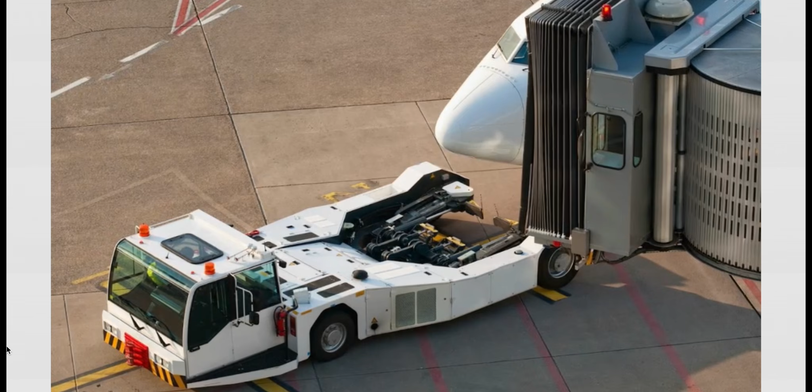At present, there is no real standardization between the certification of aircraft equipment and airport equipment, services, and facilities. With the total system approach to AWO, EASA is attempting to standardize the certification of all portions of the equation. Currently, airports have the equipment, airplanes have the equipment, and there are no real standards between the certifications of each. Runway suitability really should be determined by aircraft type and equipment, because trying to define what is regular, irregular, suitable, or not suitable doesn't really work unless you're thinking about what the aeroplanes are capable of accomplishing under current conditions.

This program will not go into detail about low visibility operations, LVO, since the definition extends to all those below an RVR of 550 meters. The LVTO concept of operations extends to all takeoffs with an RVR of less than 550 meters. However, they will require specific approval for those LVTOs with an RVR of less than 400 meters, continuous descent final approach, and performance-based navigation, but these are covered in separate courses which will be edited to include some of the material covered in this program. List of regulations.

The new CS AWO Issue 2 is divided into 3 subparts. Subpart A has all the info on the enabling equipment: ALS, HUD, EFVS, SVGS, CVS. Subparts B and C basically contain the performance requirements and airworthiness type information.

EASA Implementation Document, October 15, 2022, document 013. ICAO Annex 1, 4, 6, 10, 14. Advisory Circular 120-29, for U.S. operators. Aerodrome Equipment, Services, and Categories.

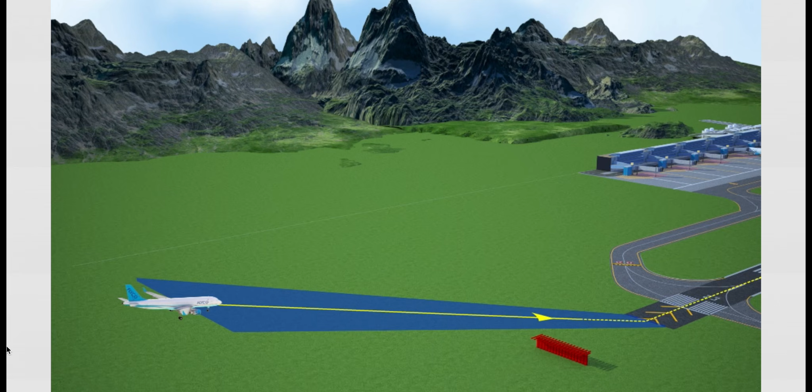Aerodrome Category A is an aerodrome that meets all the following conditions: has a straight-in 3D instrument approach procedure with a glide path angle of not more than 4.5 degrees to each runway expected to be used for landing, and at least one runway with no performance-limited procedure for takeoff and/or landing, such as no requirement to follow a contingency procedure for obstacle clearance in the event of an engine failure on takeoff from any runway expected to be used for departure.

A night operations capability is also required. The contingency procedures for obstacle clearance requirement implies that as long as one runway has no limitation on the engine-out contingency procedure for the intended operations, the airport will be categorized as Aerodrome Category A.

Aerodrome Category B is an aerodrome that does not meet the Category A conditions, or which requires extra considerations due to having non-standard approach aids and/or approach patterns, such as restrictions on the availability of straight-in instrument approach procedures; unusual local weather conditions, such as environmental features that can give rise to turbulence, wind shear, or unusual wind conditions; or unusual characteristics or performance limitations, such as unusual runway characteristics in length, width, slope, markings, or lighting that present an atypical visual perspective on approach.

Any other relevant considerations, including obstructions, physical layout, lighting, etc., such as restrictions on circling in certain sectors due to obstacles in the circling area. Special training or flight crew experience requirements stipulated by the competent authority responsible for the aerodrome that does not include instruction in a simulator or visiting the aerodrome.

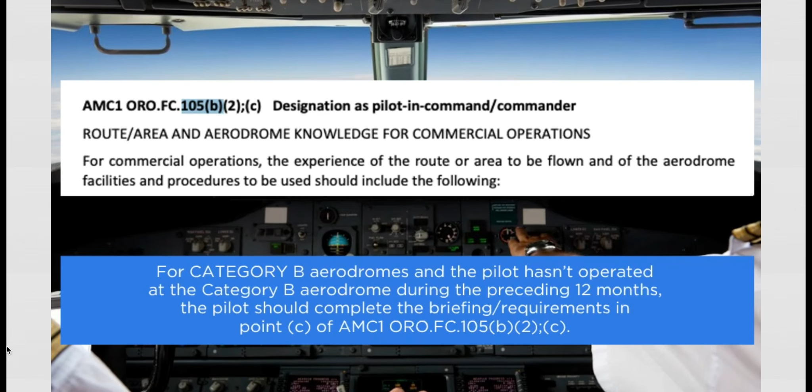For Category B aerodromes, when the pilot hasn't operated at the Category B aerodrome during the preceding 12 months, the pilot should complete the briefing requirements in Point C of AMC1 ORO.FC.105(b)(2);(c). For Category C, when the pilot hasn't operated at the Category C aerodrome during the preceding 12 months, the pilot should complete the briefing requirements in Point D of the same AMC.

Aerodrome knowledge: aerodrome familiarization training should include knowledge of obstructions, physical layout, lighting, approach aids, and arrival, departure, holding, and instrument approach procedures, applicable operating minima, and ground movement considerations.

The operations manual should describe the method of categorization of aerodromes and, in the case of CAT operations, provide a list of those aerodromes categorized as B or C. The completion of the briefing, visit, and/or instruction should be recorded.

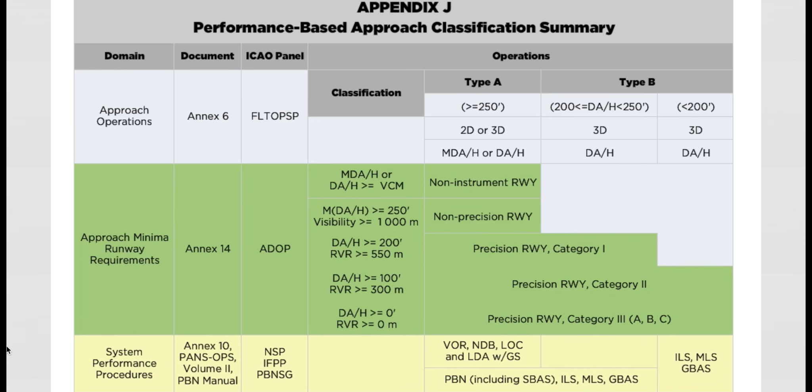Runway types: with the new system of aerodromes and approach types, there is a new definition of runway types. The term instrument runway refers to the following types of runways intended for the operation of aircraft using instrument approach procedures: a non-precision approach runway, or a runway served by visual aids and at least one non-visual aid, intended for landing operations following a Type A instrument approach operation.

A precision approach runway, Category 1, is a runway served by visual aids and at least one non-visual aid, intended for landing operations following a Type B, Cat 1 instrument approach operation.

Precision approach runway, Category 2, is a runway served by visual aids and at least one non-visual aid, intended for landing operations following a Type B, Cat 2 instrument approach operation.

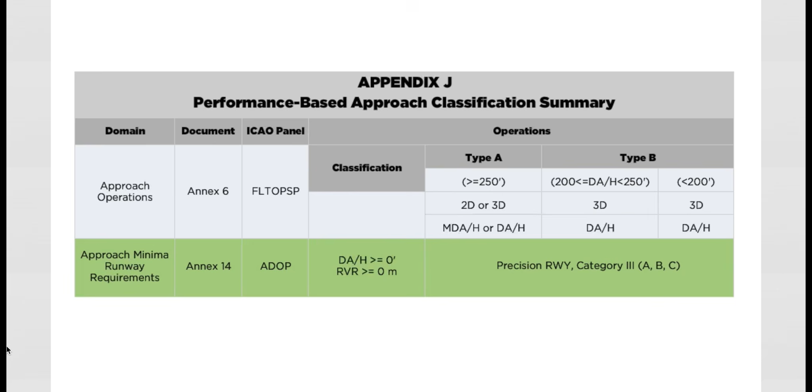Precision approach runway, Category 3, is a runway served by visual aids and at least one non-visual aid, intended for landing operations following a Type B, Cat 3 instrument approach operation. A non-instrument runway refers to a runway intended for the operation of aircraft using visual approach procedures.

This implies that operators must request the corresponding approval, in addition to aligning the procedure with the new AWO regulatory framework. New approach terminology: Annex 1 of Regulation EU 965/2012 has been edited to delete certain definitions that are no longer applicable, introduce those corresponding to new elements, and modify existing ones to clarify concepts and align with ICAO definitions.

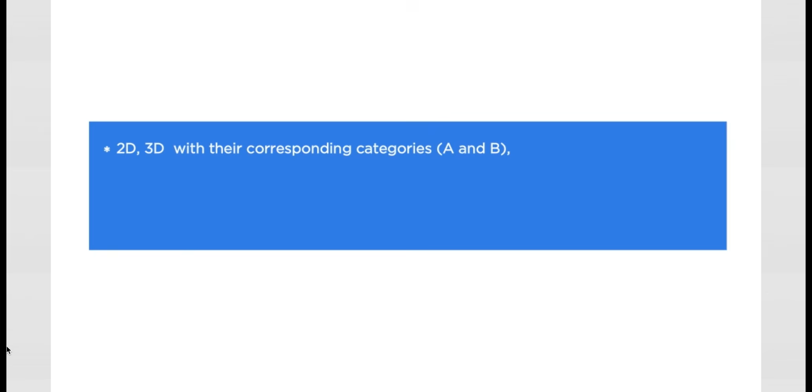A summary of the new definitions of instrument approach operations includes 2D and 3D, with their corresponding categories A and B, as well as those corresponding to the procedures PA, LPV, and NPA, to align with ICAO definitions. Likewise, the definitions of new types of operation, such as EFVS or EFVS 200 operation, are introduced.

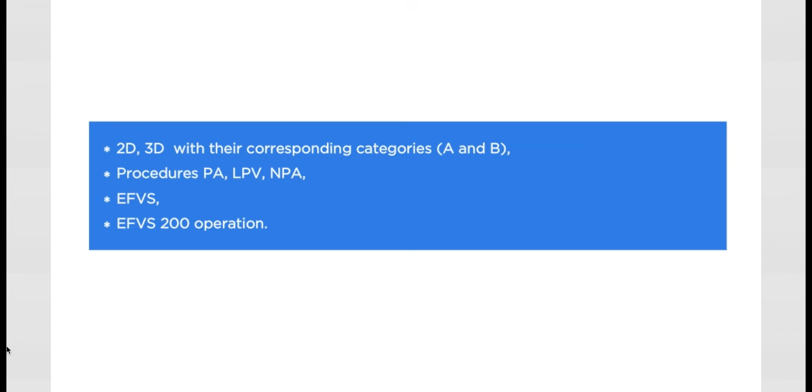Since new terms are being applied, it's important to note the new focus of the SPA part. The concept of operational credit is introduced. The operations of LTS Cat 1, OTS Cat 2, and EVS approaches disappear under the new AWO procedures.

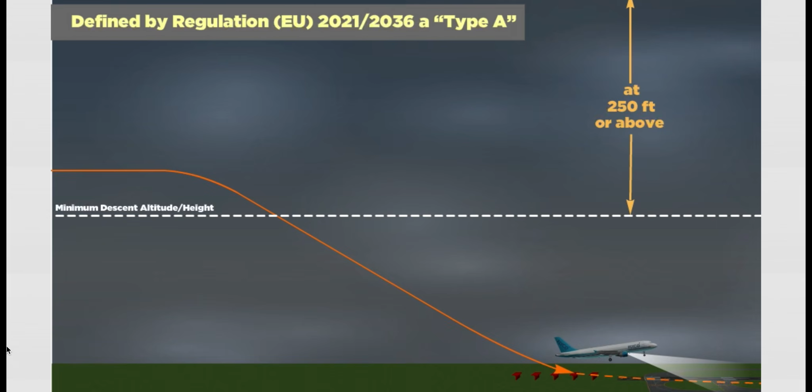Type A approach operations: as defined by Regulation 2021-2036, a Type A instrument approach operation means an instrument approach operation with an MDH or a DH at or above 75 meters or 250 feet. In the new regulation, a precision approach with minima above DH 250 feet would be considered a Type A instrument approach operation.

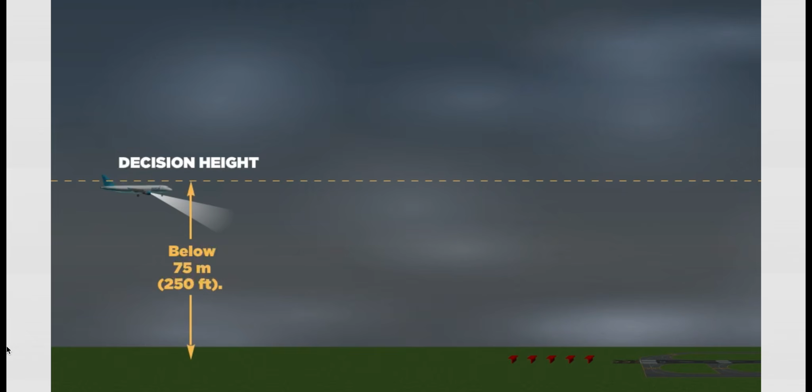Type B approach operations: a Type B has a decision height below 75 meters, 250 feet. Type B instrument approach operations are categorized as Category 1, Cat 1: a decision height not lower than 60 meters, 200 feet, and with either a visibility not less than 800 meters or a runway visual range not less than 550 meters.

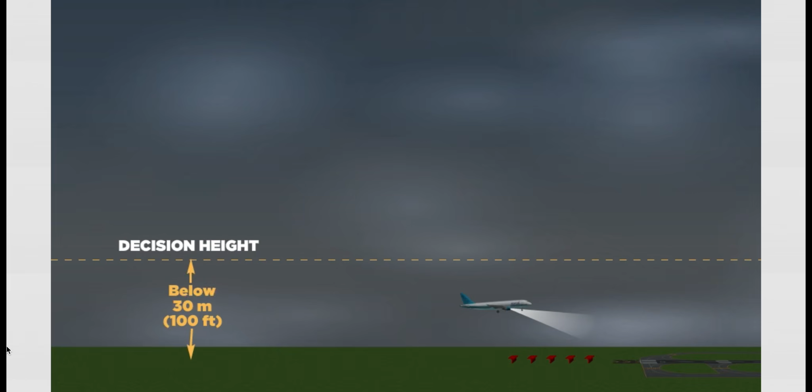Category 2, Cat 2: a decision height lower than 60 meters, 200 feet, but not lower than 30 meters, 100 feet, and a runway visual range not less than 300 meters. Category 3, Cat 3A and Cat 3B are deleted; the new regulatory framework simply refers to Cat 3 operations.

The concept of operational credits is introduced, which allows the application of reduced minimums to those aircraft that have equipment additional to that required as standard in relation to a given operation.

The ED Decision 2022-012R has replaced the old Cat 3A with an RVR of 200 meters, and Cat 3 decision height of 50 to 99 feet with RVR 175 meters. Cat 3 operations have several implications in AWO and in the aerodrome selection policy.

The lowest decision height values to be used for particular aircraft installations will be described in the AFM. The reference to the type of rollout systems used is included to allow the determination of the appropriate RVR value, based on the pilot's need to be able to control the rollout as a certification requirement.

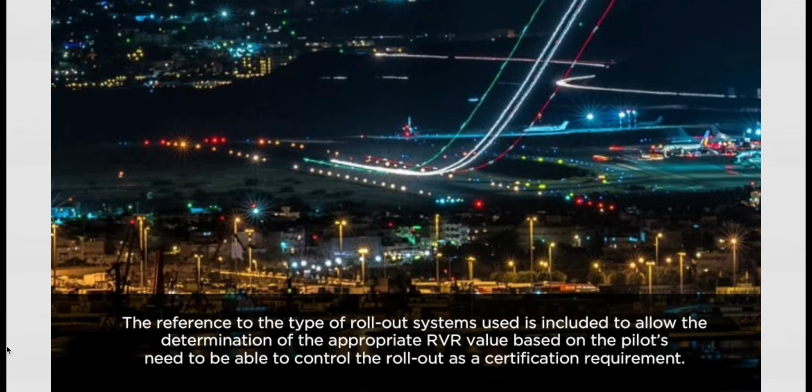The lowest RVR for a decision height between 50 and 100 feet, previously Cat 3A, will be 175 meters, previously 200 meters, to be aligned with the new ICAO standard for Cat 3A. The provision for an RVR of 150 meters for aircraft certificated as Super Fail Passive is removed.

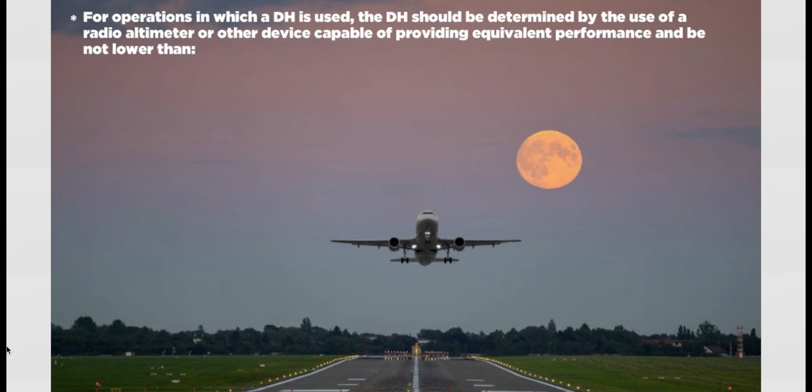For Cat 3 operations, the following should apply: for operations in which a decision height is used, the decision height should be determined by the use of a radio altimeter or other device capable of providing equivalent performance, and be not lower than the minimum decision height specified in the AFM if stated.

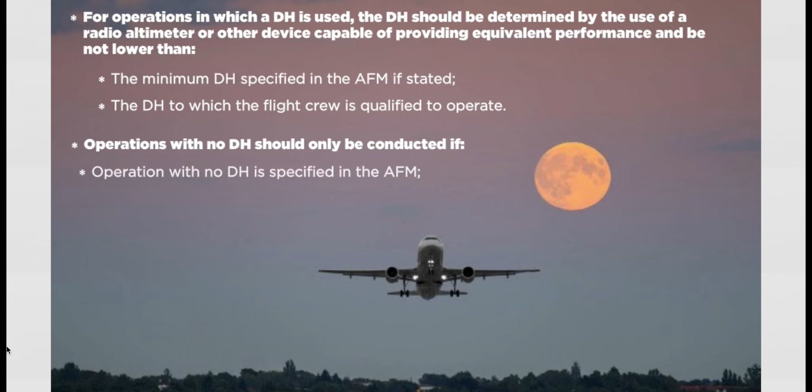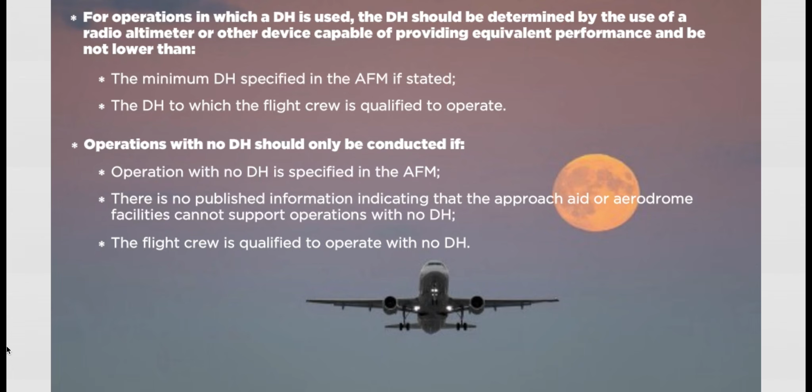The decision height to which the flight crew is qualified to operate. Operations with no decision height should only be conducted if specified in the AFM, if there is no published information indicating that the approach aid or aerodrome facilities cannot support such operations, and if the flight crew is qualified to operate with no decision height. The lowest RVR to be used should be determined per current tables.

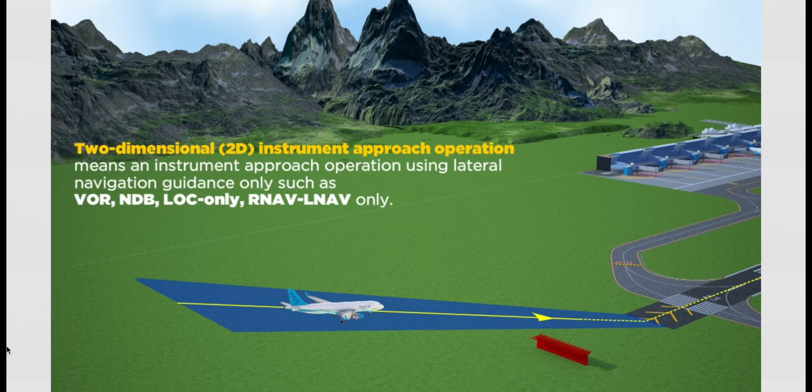2D and 3D approach operations. A two-dimensional, 2D, instrument approach operation means an instrument approach operation using lateral navigation guidance only, such as VOR, NDB, LOC only, or RNAV LNAV only. This is what we used to refer to as a non-precision approach, NPA. A three-dimensional, 3D, instrument approach operation means an instrument approach operation using both lateral and vertical navigation guidance, such as ILS, MLS, GLS, LNAV/VNAV, and LPV, which we used to refer to as a precision approach.

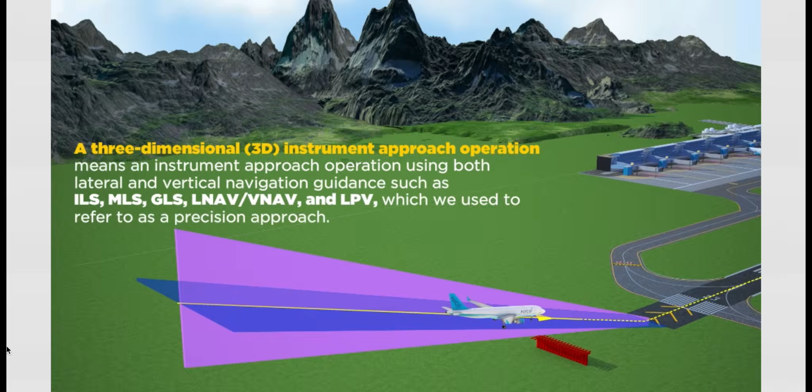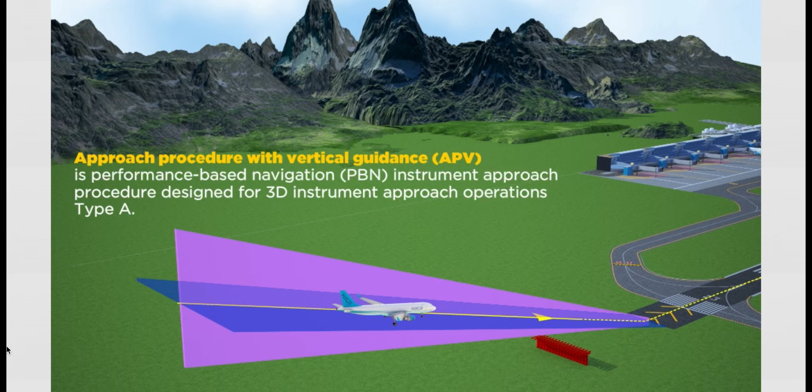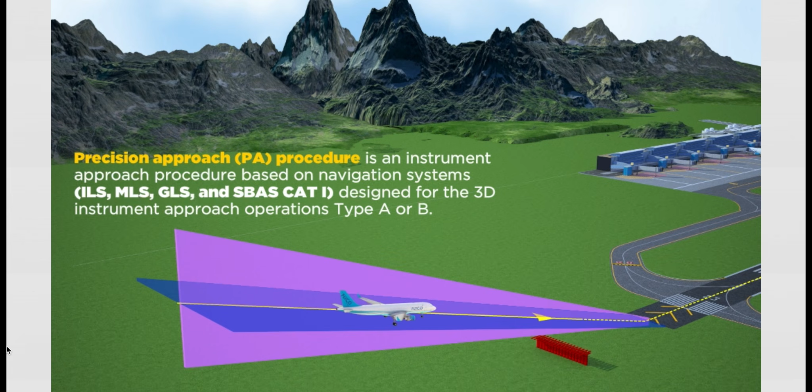Other approach terms. A non-precision approach procedure is an instrument approach procedure designed for 2D instrument approach operations type A. An approach procedure with vertical guidance is a performance-based navigation instrument approach procedure designed for 3D instrument approach operations type A. A precision approach procedure is an instrument approach procedure based on navigation systems such as ILS, MLS, GLS, and SBAS CAT-I, designed for 3D instrument approach operations type A or B.

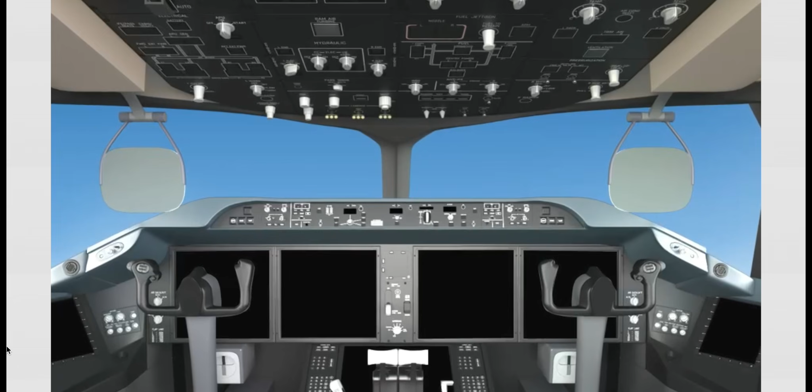Technology assistance for approaches. A head-up display is a method of presenting flight information to the pilot in the line of their forward vision, which projects key flight instrument data onto a small see-through screen positioned just in front of the pilot's line of sight looking ahead out of the aircraft. An Enhanced Flight Vision System is an aircraft system using a HUD or equivalent display to present aircraft information, flight symbology, and an electronic real-time sensor image of the forward external scene.

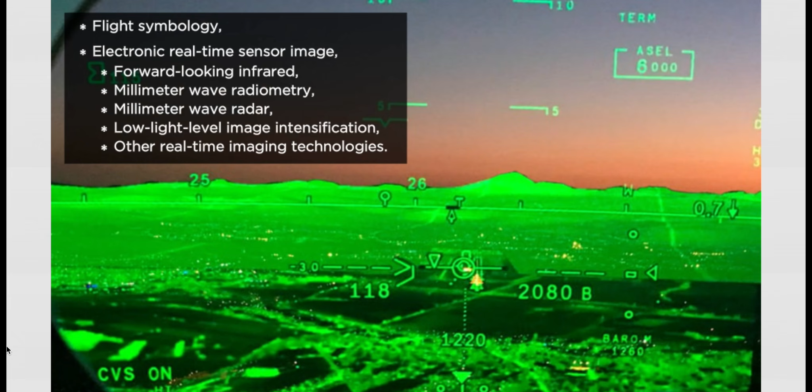Imaging sensors can be forward-looking infrared, millimeter wave radiometry, millimeter wave radar, low light level image intensification, or other real-time imaging technologies. Enhanced flight visibility means the average forward horizontal distance from the cockpit of an aircraft in flight at which prominent topographical objects may be clearly distinguished and identified by day or night by a pilot using an enhanced flight vision system. Flight visibility refers to a pilot's visibility using natural vision, while enhanced flight visibility refers to a pilot's enhanced visibility using EFVS imagery.

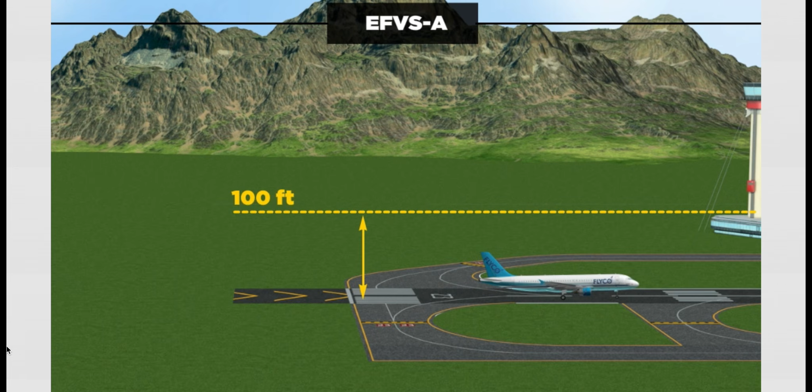EFVS-A is a system that may be used for approach operations down to a height of 100 feet above the runway. EFVS-L is a system that may be used all the way to landing. EFVS-L systems will additionally provide flare cueing and height information from a radio altimeter.

EFVS 200 is an operation in which visibility conditions require an EFVS to be used instead of natural vision to continue an approach to 200 feet above the runway threshold, in other than LVO operations. It is an operation with an operational credit in which visibility conditions require an EFVS to be used up to 200 feet above the FATO or runway threshold. From that point to land, natural vision is used. The RVR shall not be less than 550 meters.

Circling approaches. A circling approach operation refers to a Type A instrument approach operation to bring an aircraft into position for landing on a runway, final approach and takeoff area, FATO, that is not suitably located for a straight-in approach.

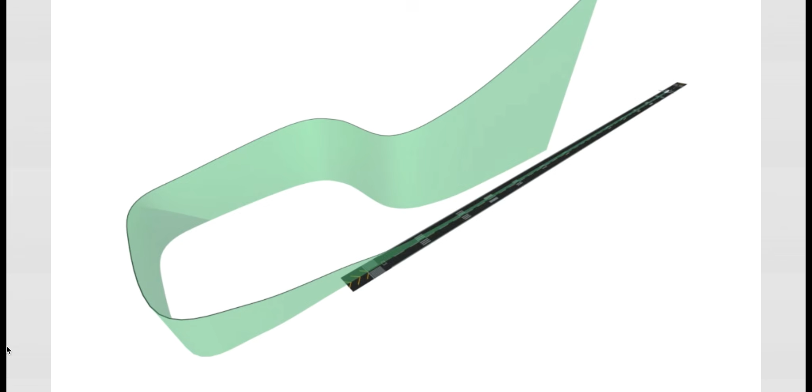ED Decision 2022-012R has deleted the former point on the RVR CMV derived for the preceding instrument approach procedure, which means that in the new regulatory environment there is no need to increase the visibility minima to the preceding instrument approach procedure. However, regulations maintain the provision to increase the DH or MDA to the preceding instrument approach procedure. The intention of the regulation is that operators should provide guidance for the visibility needed when, for example, the circling OCH drives the MDH to higher values, or when the operator uses higher values as a standard policy. In that case, the main factor to be considered is the distance needed to descend from circling minima to 50 feet above the runway threshold using a normal descent gradient.

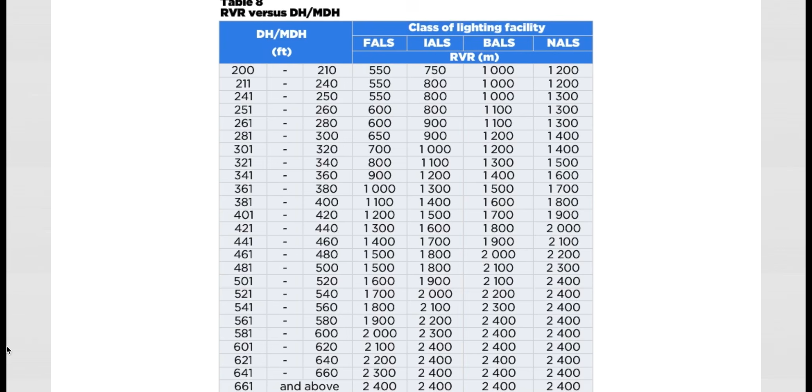Determination of RVR or VIS for instrument approach operations. To determine the RVR or VIS for an instrument approach for aeroplanes, use the following criteria. The RVR or VIS for straight-in instrument approach operations should be not less than the greatest of the minimum RVR or VIS for the type of runway used according to Table 9, and the minimum RVR determined according to the MDH or DH and class of lighting facility according to Table 8.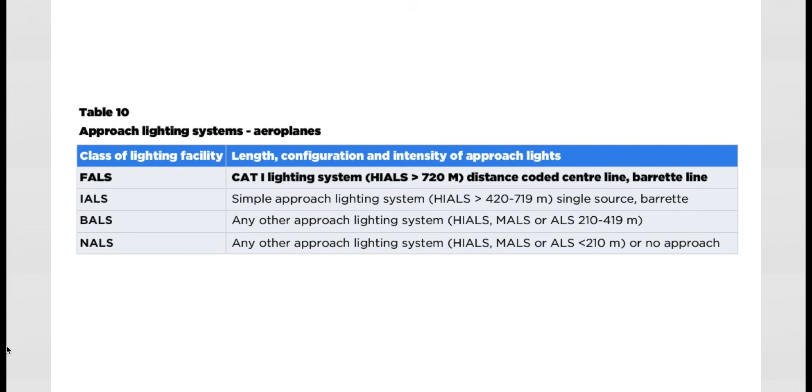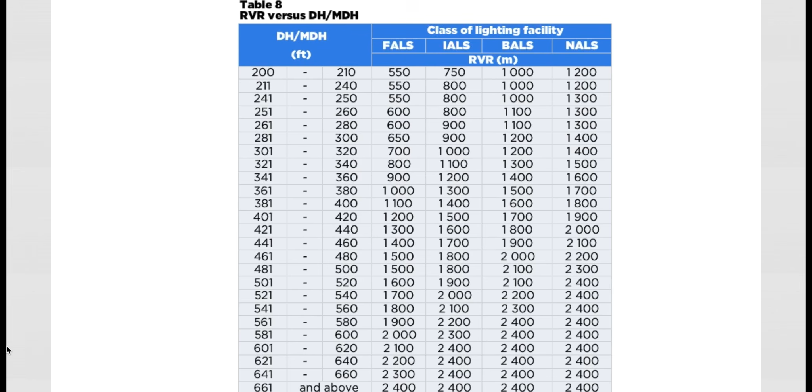Or the minimum RVR according to the visual and non-visual aids and onboard equipment used according to Table 9. If the value determined in Table 8 is a VIS, then the result is a minimum VIS; in all other cases, the result is a minimum RVR. In Table 9, for Category A and B aeroplanes, if the RVR or VIS determined in accordance with Table 8 is greater than 1,500 meters, then 1,500 meters should be used.

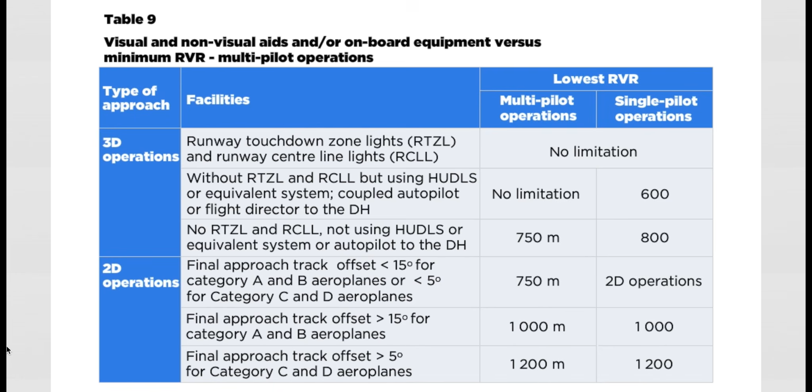Establishing aerodrome operating minima: the starting point for the method is the standard values provided by the service providers or instrument approach procedure charts, which usually cover the majority of aerodrome operating minima. Therefore, the operator's method should focus on the deviations, positive or negative, from those standard conditions based on the rules, the operation specifications, and circumstances applicable to each case. The method must be based on relevant safety assessments and described in sufficient detail to assure all risks are documented.

Operational credits under AWO: the credit approval requirements for EVS capability differ based on whether the intended function of the system is to increase situational awareness or to obtain operational credit. If enhanced visual imagery is used to improve situational awareness, no operational approval is required. If it is to be used for operational credit, the installed equipment must be certificated for the intended purpose. Such certification is described in the Aircraft Flight Manual or Flight Manual Supplement.

Operational approvals require that the imagery is combined with flight guidance and presented on a HUD. They may also require that this imagery is available to the second pilot, either on a second HUD or a head-down display. The pilots can use this system to commence an approach in a lower RVR than would otherwise be permitted, and to continue the approach below decision height provided that visual reference is available using the EVS.

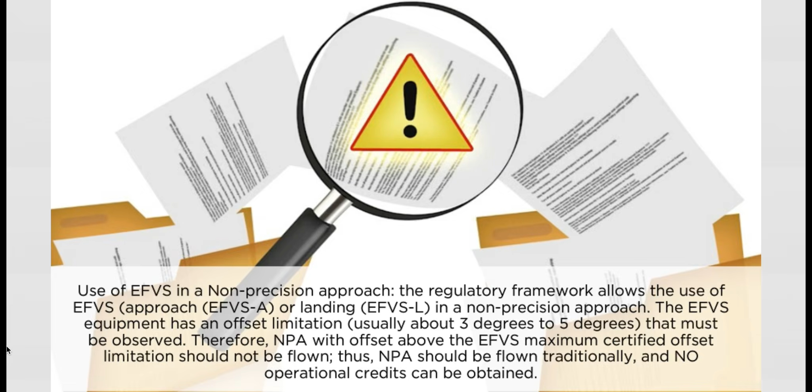The new European AWO regulatory system follows the principle that EFVS should be certified and the performance assessed. Therefore, the RVR minima should be determined in accordance with the AFM for the expected weather conditions. Operational credit for the old Cat 3A RVR 200 meters can be credited to Cat 3 as follows.

Option A, prior approval, grandfathering: the operator does not amend its training and checking program to reflect the new minimum of 175 meters, and instead keeps 200 meters. The operator amends its SOP and manuals only to reflect the replacement of Cat 3A to Cat 3, an editorial amendment. However, the operator maintains an RVR of 200 meters.

The operator notifies the authority about the replacement of Cat 3A to Cat 3, if the operator is entitled to perform those amendments without prior approval. The authority amends the OPS spec to reflect the new naming convention regarding Cat 3, and maintains the RVR of 200 meters in the new OPS spec form. Note that the operation specification is part of the certificate of the AOC, and therefore, if there is a change of the scope of the operation specification.

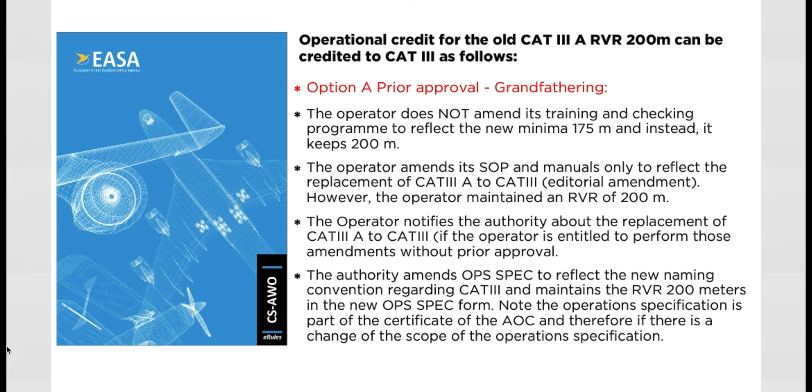Option B: the operator amends its training and checking program to reflect the new minimum of 175 meters. The training should highlight the new visual scenario, visual cues, at DH. From 200 meters to 175 meters, the difference is about one light difference in the center line. The operator does not need to conduct an additional simulator check, however, the next regular OPC-LPC EBT module should follow the new amended value of 175 meters.

The operator amends its SOP in accordance with Cat 3 RVR 175 meters. The authority may amend the operator's OPS spec at the same time it approves the operator's training and checking program and SOPs. Special approval for Cat 1.

A new operation credit for SA Cat 1 with a DH of 150 feet or above and an RVR of 400 meters or above. SA Cat 1 is an evolution from LTS Cat 1. However, the approval of LTS Cat 1 cannot be credited directly to SA Cat 1.

This new certification specification ensures that Autoland, or alternative technology, maintains the center line even with lower performant ground equipment, Cat 1 instead of Cat 2. Thus, automatic credit from LTS Cat 1 to SA Cat 1 should not happen, even if the minima proposed by

the operator of the new SA Cat 1 is the same as the LTS Cat 1. OTS Cat 2 credit to special approval Cat 2. The old OTS Cat 2 can be credited to SA Cat 2 as follows.

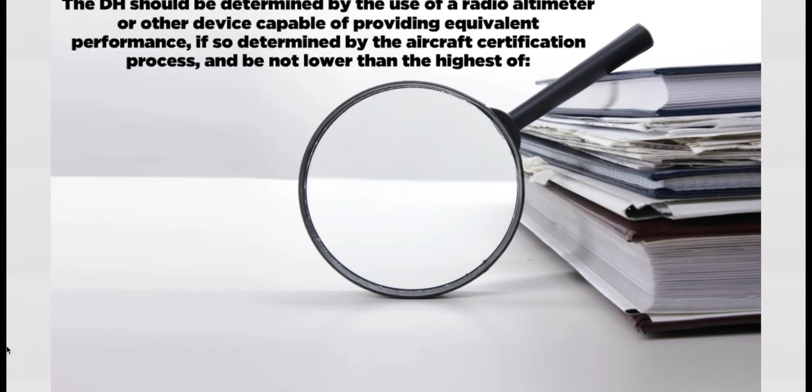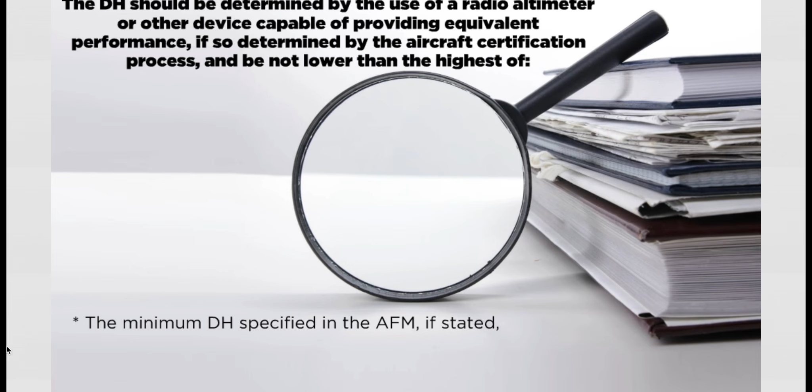The DH should be determined by the use of a radio altimeter or other device capable of providing equivalent performance, if so determined by the aircraft certification process, and be not lower than the highest of the minimum DH specified in the AFM, if stated, the applicable OCH for the category of airplane, the DH to which the flight crew is qualified to operate, or 150 feet.

The following visual aids should be available: approach lights as specified in Table 9, precision approach runway markings, Category 1 runway lights. The lowest RVR minima to be used are specified in Table 9.

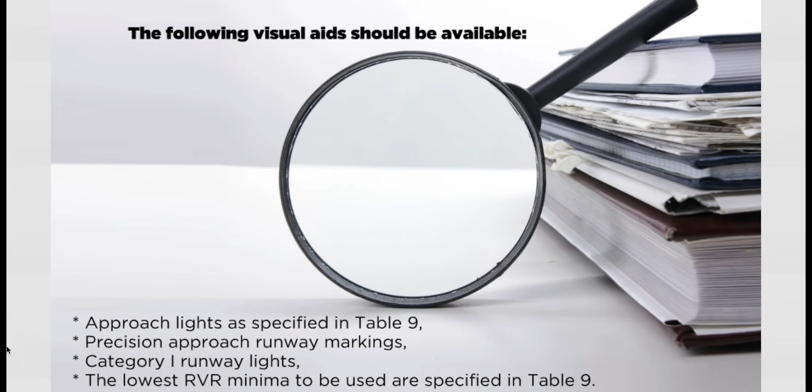Equipment certification for operational credits. The details of the equipment requirements for certain types of LVOs and operations with operational credits.

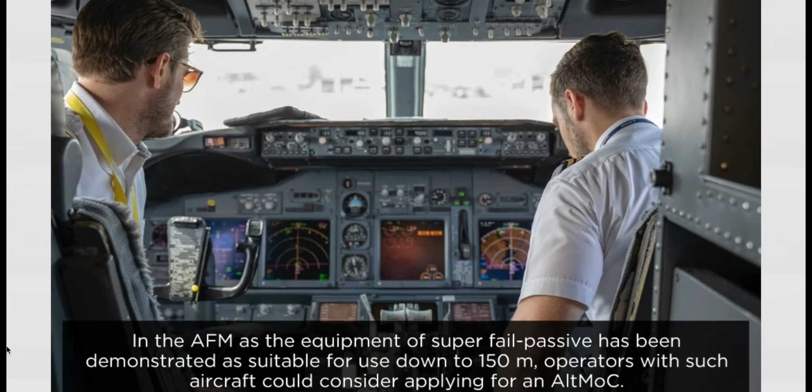In the AFM, as the equipment of super fail passive has been demonstrated as suitable for use down to 150 meters, operators with such aircraft could consider applying for an AltMoC. The minimum RVR for DH below 50 is 125 meters in the current rules, based on a fail-passive rollout system.

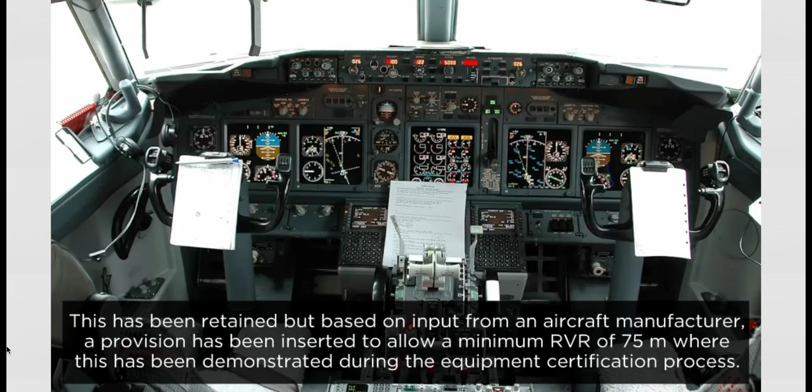This has been retained, but based on input from an aircraft manufacturer, a provision has been inserted to allow a minimum RVR of 75 meters where this has been demonstrated during the equipment certification process.

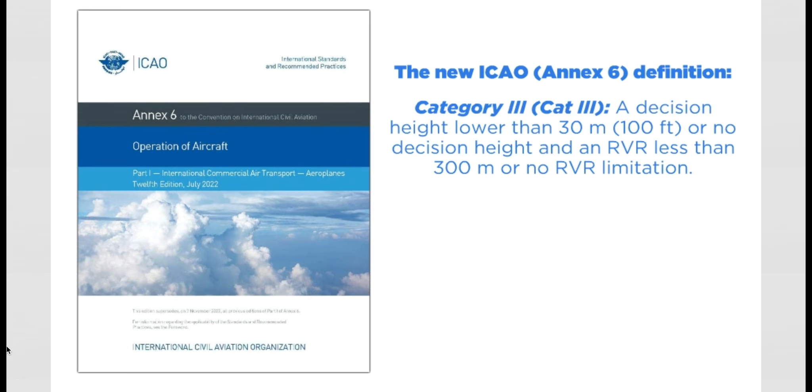The new ICAO, Annex 6, definition. Category 3, a decision height lower than 30 meters, 100 feet, or no decision height, and an RVR less than 300 meters or no RVR limitation.

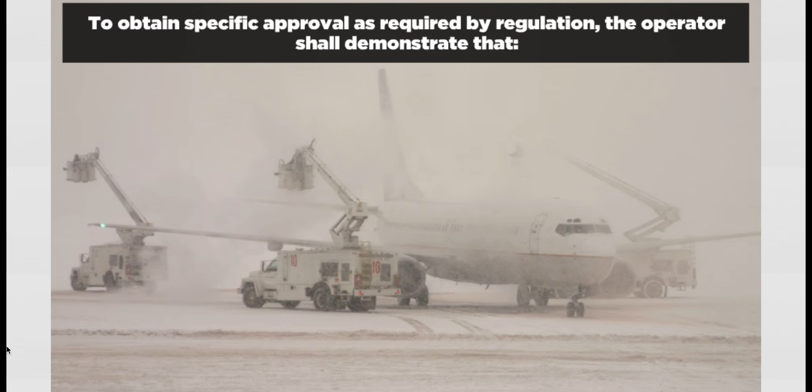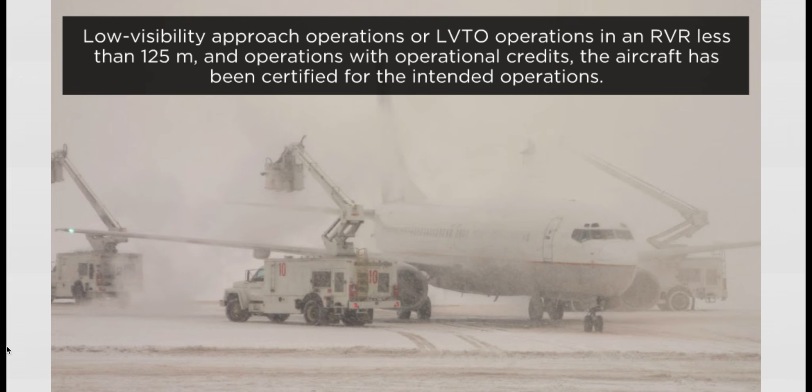To obtain specific approval as required by regulation, the operator shall demonstrate that low visibility approach operations or LVTO operations in an RVR less than 125 meters, and operations with operational credits, the aircraft has been certified for the intended operations. The flight crew members are competent to conduct the intended operation, and a training and checking program for the flight crew members and relevant personnel involved in the flight preparation has been established.

Operating procedures for the intended operations have been established. Any relevant changes to the minimum equipment list have been made.

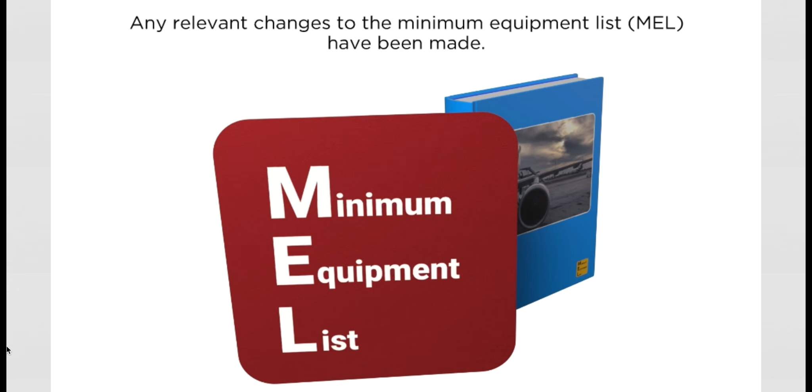Review the minimum equipment list to update the new terminology. Each individual operator should assess the impact of the regulatory changes regarding LVO operations on its particular MEL, and propose the appropriate changes to the MEL, if necessary.

AWO training requirements. EVS training. The training part of SPA. LVO is referred to as flight crew competence. The material has been expanded, providing more details. The competency to conduct the intended operations required is specified in the first 3 AMCs.

Training for EVS must address all flight operations for which the enhanced vision display is approved. This training must include contingency procedures required in the event of system degradation or failure.

Training for EVS used for situational awareness should not interfere with other required operations. Training for EVS used for operational credit also requires training for the applicable HUD used to present the enhanced visual imagery.

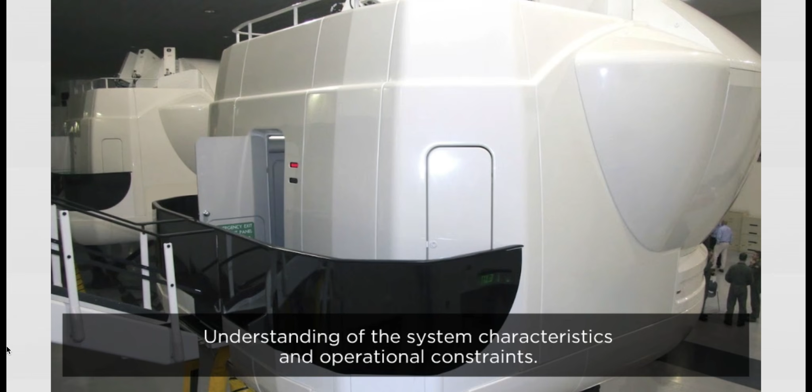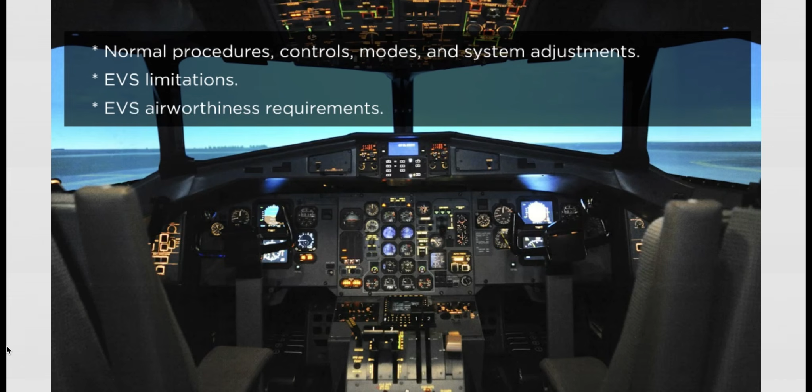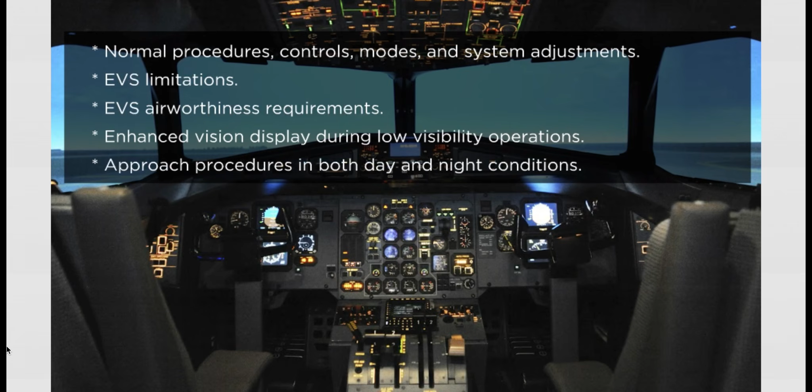EVS training should include the following elements as applicable: understanding of the system characteristics and operational constraints, normal procedures, controls, modes, and system adjustments, EVS limitations, EVS airworthiness requirements, enhanced vision display during low visibility operations, including taxi, takeoff, instrument approach, and landing. System used for instrument approach procedures in both day and night conditions.

Failure modes of the EVS and the impact of the failure modes or limitations upon crew performance, in particular for two-pilot operations. Crew coordination and monitoring procedures and pilot call-out responsibilities.

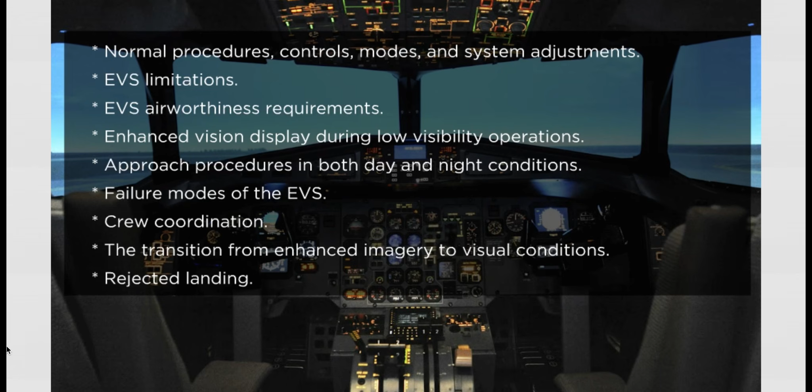The transition from enhanced imagery to visual conditions during the runway visual environment. Rejected landing, loss of visual cues of the landing area, touchdown zone, or rollout area. And any effects that weather, such as low ceilings and visibilities, may have on the performance of an EVS.

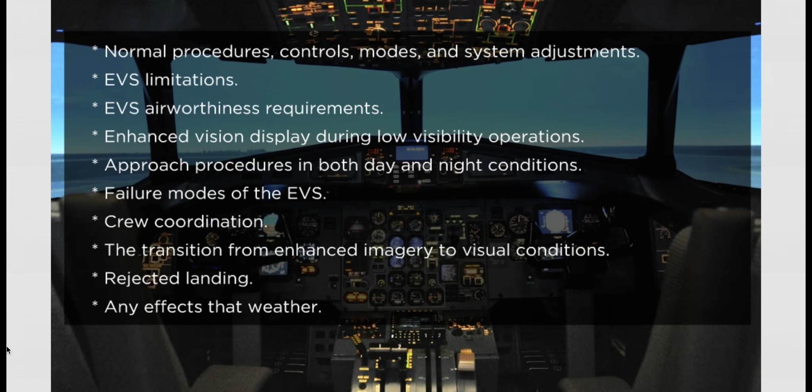LED runway lighting may not be visible to crews using HUD EVS due to the fact that LEDs are non-incandescent lights. Operators must revise their operations manual and checklists to include information guidance on standard operating procedures. Manuals and checklists must be submitted for review as part of the operational credit process.

Practices and procedures in the following areas must be standardized and include ground and flight procedures and flight crew qualification requirements: definitions, check that crew was qualified for EVS operations, MEL handling, equipment required for EVS operations.

Types of approach where EVS are approved. A statement that autopilot flight director should be used whenever possible. Minimum visual references for landing.

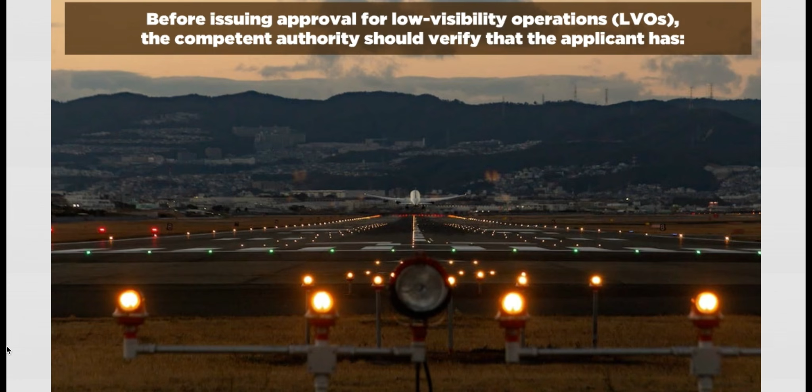Before issuing approval for low visibility operations, the competent authority should verify that the applicant has taken account of the relevant airworthiness requirements and limitations, established the relevant aerodrome operating minima, and established and documented the relevant operating procedures.

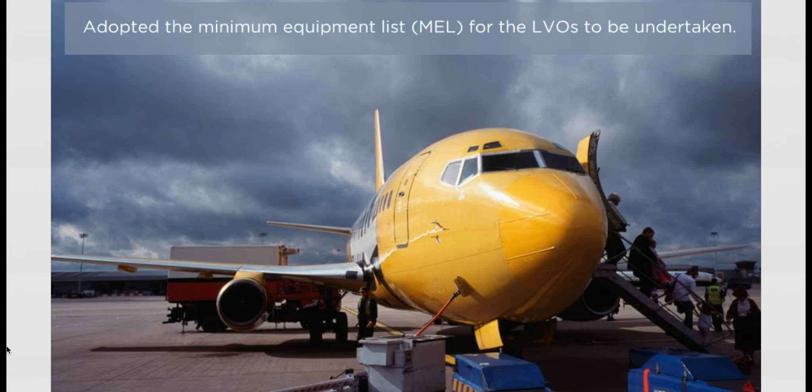Established and conducted adequate training and checking programs. Adopted the minimum equipment list for the LVOs to be undertaken. Processes to ensure that only runways and instrument procedures suitable for the intended operations are used, and established and conducted the relevant risk assessment and monitoring programs.

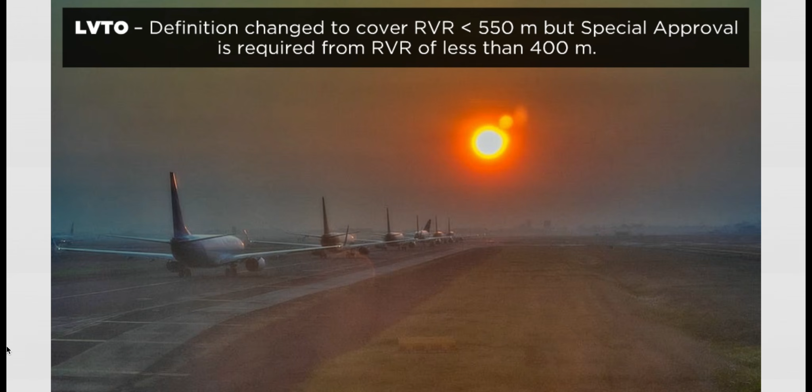LVTO, low visibility takeoffs under AWO. LVTO definition changed to cover RVR less than 550 meters, but special approval is required from RVR of less than 400 meters. The requirements for LVTO are down to 125 meters from the existing AMC 1 SPA LVO 110.

It incorporates European Union Aviation Safety Agency All-Weather Operations Manual draft version for consultation by October 15, 2022. The requirements for LVTO in an RVR of less than 125 meters also allow for the situation where equipment is certified for takeoff in lower values of RVR than 125 meters. This is to facilitate the future implementation of new technologies that could have different capabilities.

After 30-10-2022 requires prior approval related to the fuel schemes, Regulation EU 2021-1296. The aerodrome selection policy linked to the approval of fuel schemes. In-flight fuel management policy linked to the approval of fuel schemes. Special refueling procedures and defueling.

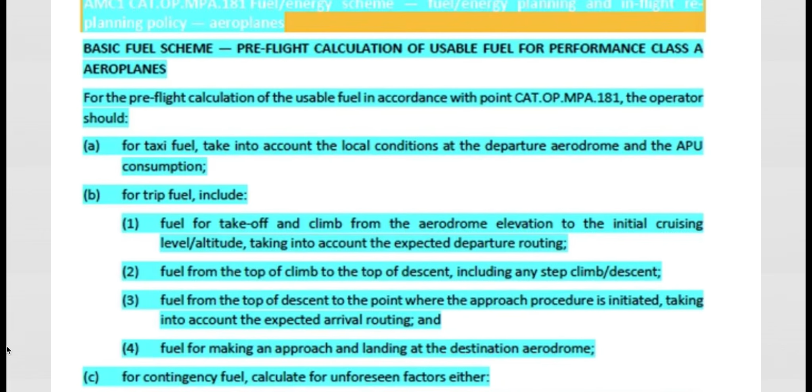Operators will only have to apply the AMC relevant for the variations to the basic fuel scheme that it intends to use. For example, an operator decides to implement only the variation covered by AMC 6 CAT OPMPA 181 is not required to include flight monitoring capabilities in its operational control system.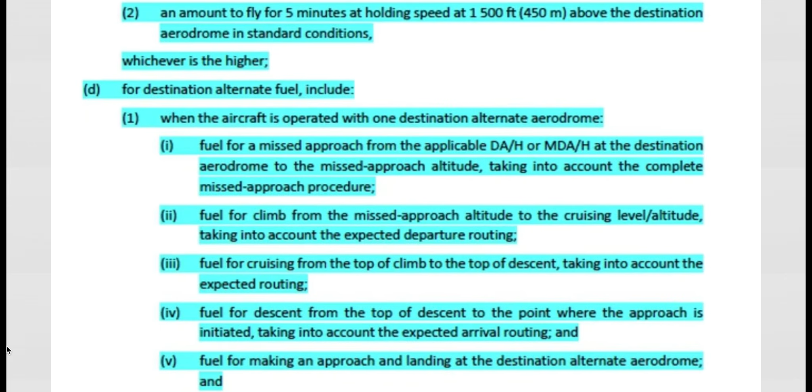Flight monitoring capabilities are required only when implementing AMC 8 CAT.OP.MPA.182 or AMC 9 CAT.OP.MPA.182, or both. If the operator has decided to implement all the planning minima covered by the AMC, on the day of operations the operator can choose any of the three options, depending on which is most favorable.

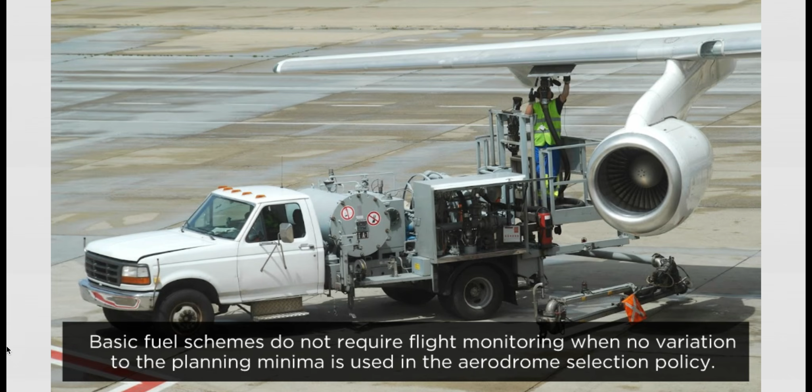Basic fuel schemes do not require flight monitoring when no variation to the planning minima is used in the aerodrome selection policy. Variations to the basic fuel schemes in the selection of aerodromes regarding the planning minima are methods to reduce the meteorological margins based on the established mitigating measures.

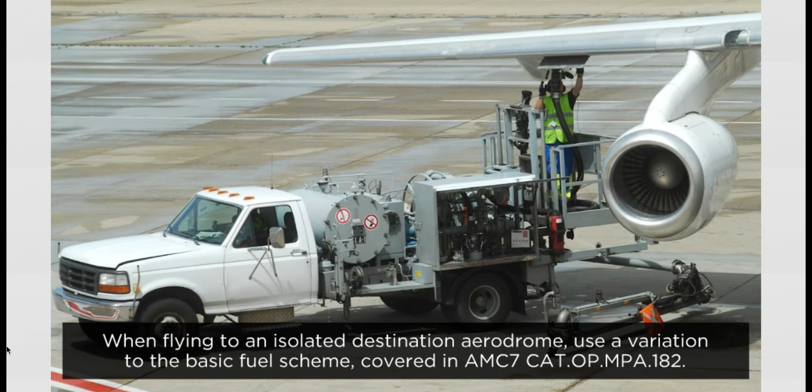The operator should establish an operational control system that includes flight monitoring when it applies. When flying to an isolated destination aerodrome, use a variation to the basic fuel scheme, covered in AMC 7 CAT.OP.MPA.182. To apply this variation, the operator needs to take into account other aspects of the fuel schemes.

Such as the safety margins for meteorological conditions that should be applied to that isolated aerodrome, for example ETA plus 1 hour, or the planning minima of such isolated aerodrome. For these matters, the operator usually will follow the requirements for the basic fuel scheme.

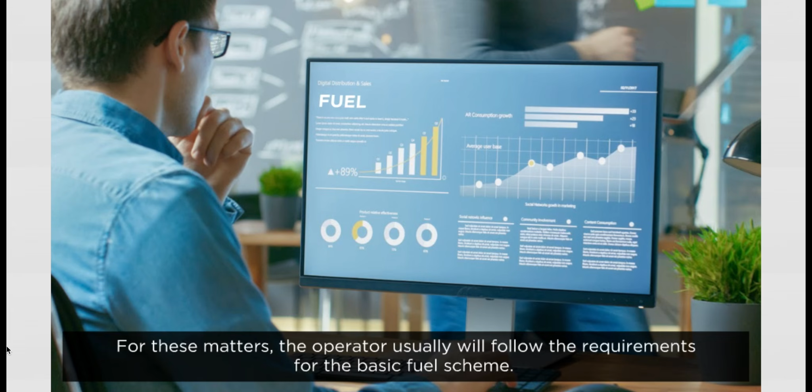Summary. This course is an introduction to the latest AWO from EASA that take effect on October 30, 2022. The course includes new terminology, changes in RVR requirements, and DA/H and MDA/H, which can be used outside of LVO to allow operators to expand their operations with the use of operational credits from advanced flight systems.